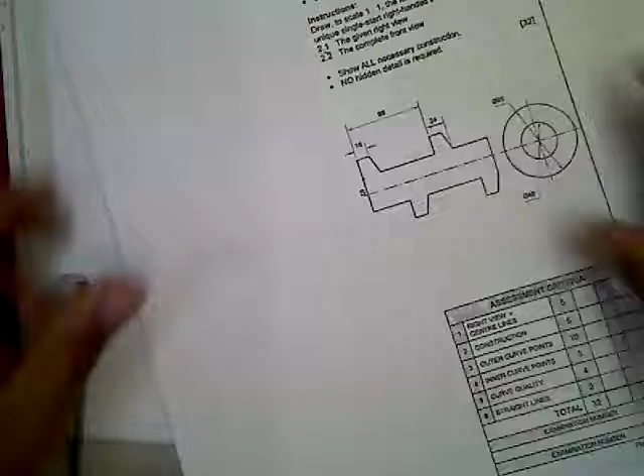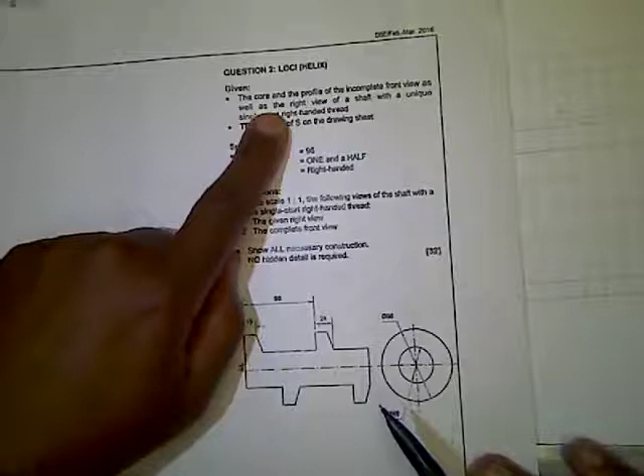Question 2, Loci, from the February-March 2016 question paper. You are given the core and the profile of the incomplete front view as well as the right view of a shaft with a unique single start right-handed thread. The position of S on the sheet is given. The position of S means this position here. That's where you're going to start drawing your front view.

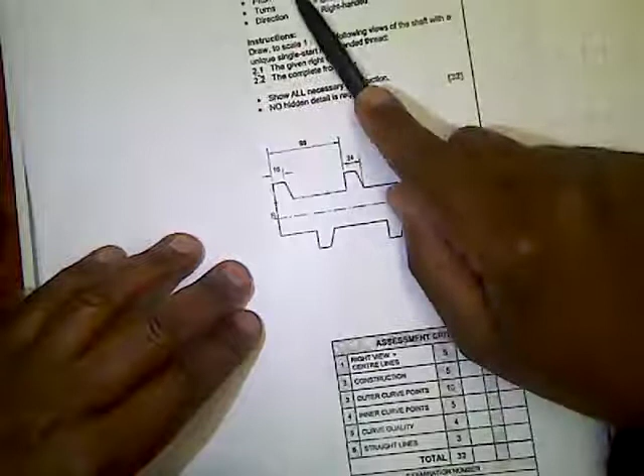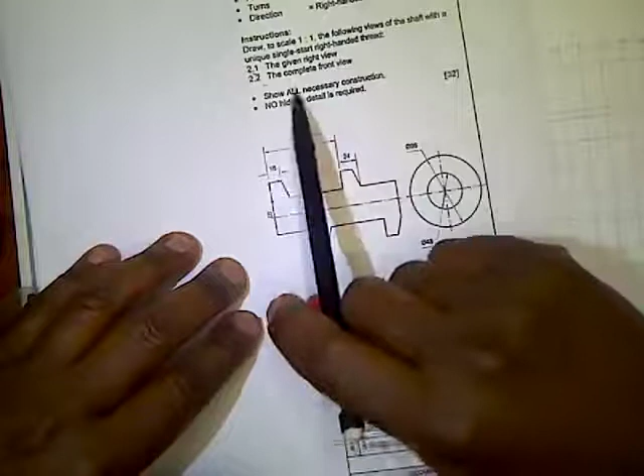Specification: the pitch is 96. How many turns are required there? It's 1.5 turns. Direction: it's right-handed. Instructions: draw to scale 1:1 the following views of the shaft with a unique single start right-handed thread. The given right view, the complete front view. Show all necessary construction, no hidden detail is required.

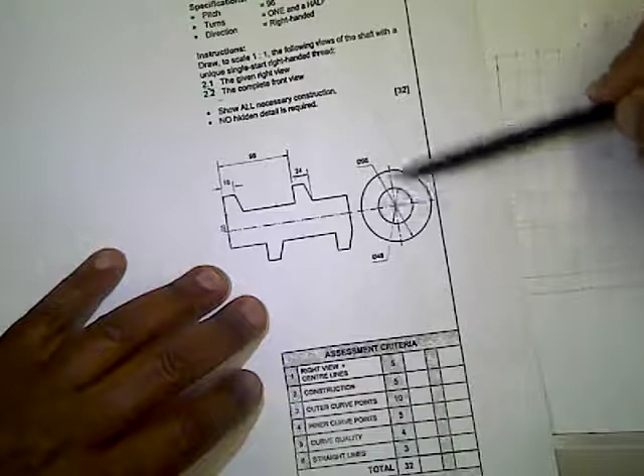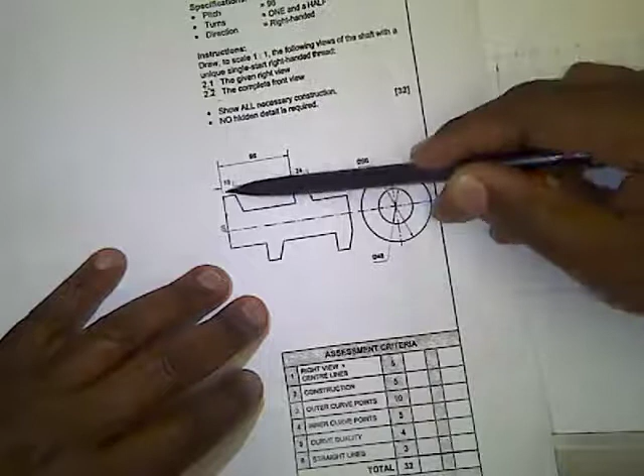Right, the given front view. Here in this front view, all you are given are the dimensions. This is where you are going to start. There was the position of S as indicated. You have your outer diameter of 96, the core diameter which is 48. That one is the pitch, which means one turn of a locus of a helix. One turn is 96, the pitch. So which simply means you will have 1, 2, 3, 4 helices. A complete turn will start this side and end on that side, and then the other half will end there on the other side.

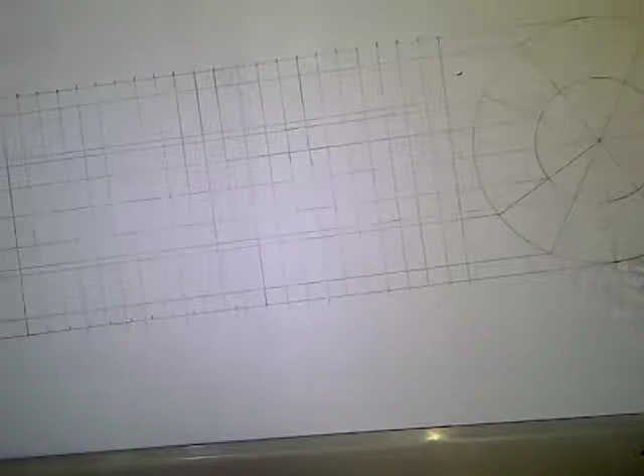So let's start drawing. Fortunately, I have already drawn the front view. I've drawn the two diameters. The 48 millimeter diameter is this one. You cannot see all of it from my camera's perspective, but you have the outside diameter which is 96. So it's already drawn, and it was divided into 12 equal parts of 30 degrees apart. We use the 30-60 degrees set square to do that.

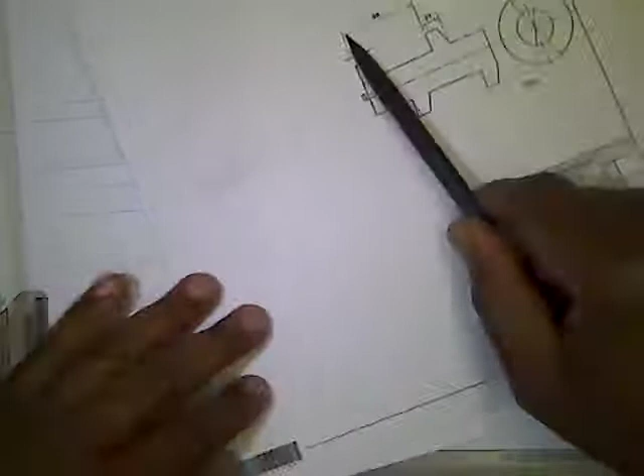And then now, since the pitch is 96, we have to divide this 96 by 12 equal divisions. That will give us 8. So we'll have 8 millimeter divisions there. There is the 8 millimeters. And then 1, 2, 3, 4, 5, 6, 7, 8, 9, 10, 11. The 12th one, that is one full helix. So it is 1.5. The other half will take 6. 1, 2, 3, 4, 5, 6. The other one will take 6.

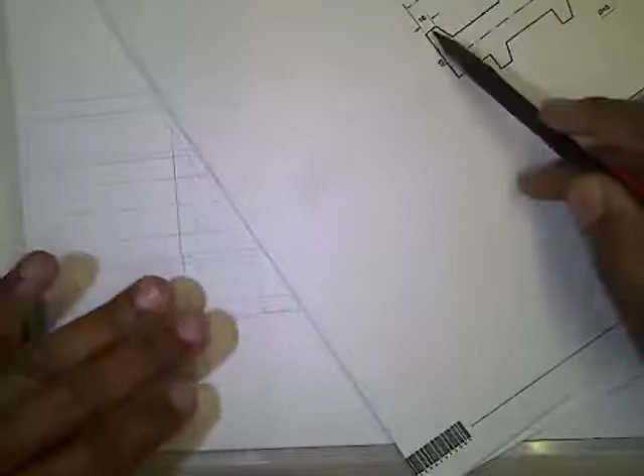It will end there. But let us start, which simply means from here to there, this 16, it takes 2 blocks. So I may prefer to start with this one. One complete turn will end there. If we start here, it will end there. It will give me one complete turn. Let's do that.

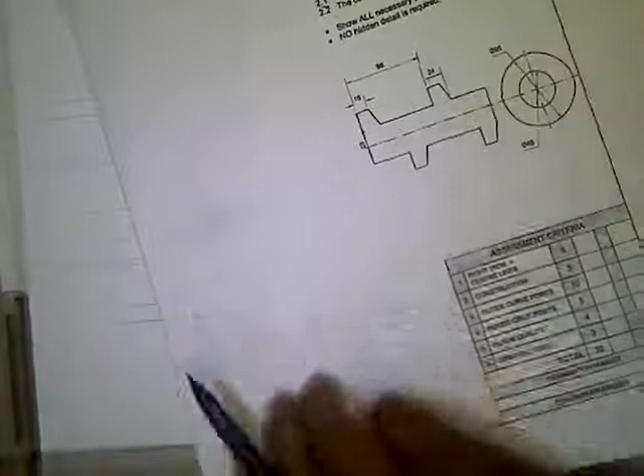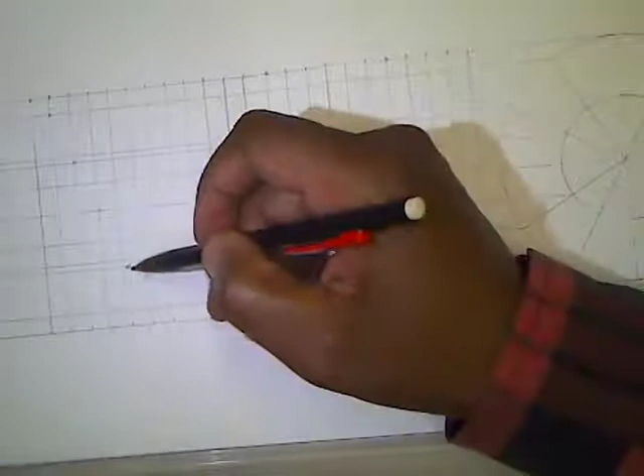We start here. 1. It is the outside diameter. We are taking it from the outside diameter. This one, from the outside diameter, will be 1. The second division, where will it be? It will be here. This one will be 2. The third one will be the center. The fourth one will be this one here. 4, 5, 6. 1, 2, 3, 4, 5, 6.

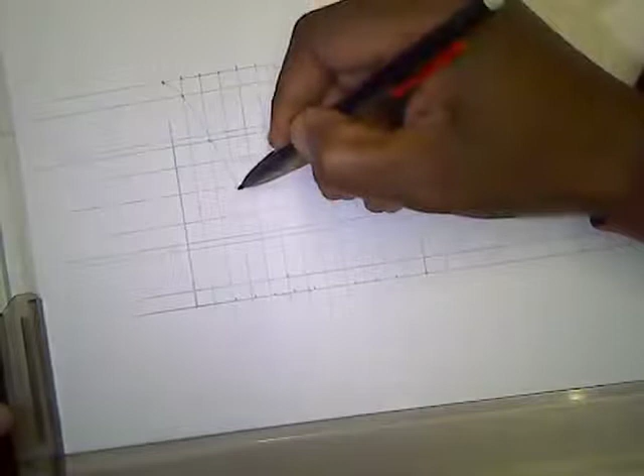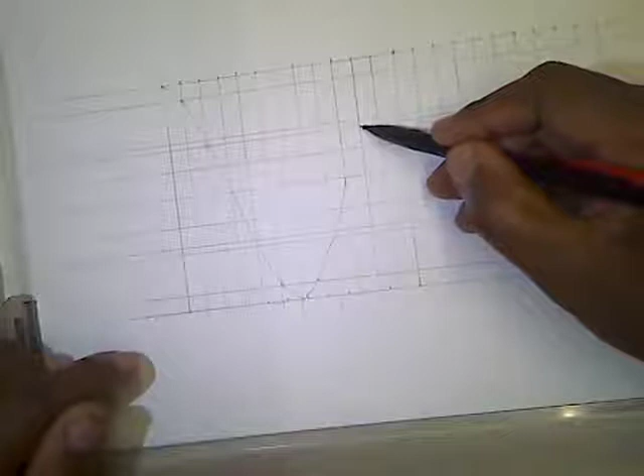I want to draw it very faintly initially. Make sure that your hand is steady. You can do it freehand. Yeah, I'm doing it freehand. It's half a turn to complete the full turn. This one corresponds with that one. 1, 2, 3 is at the center. There we go. And then it will be 1, 2, 3. It will be like that.

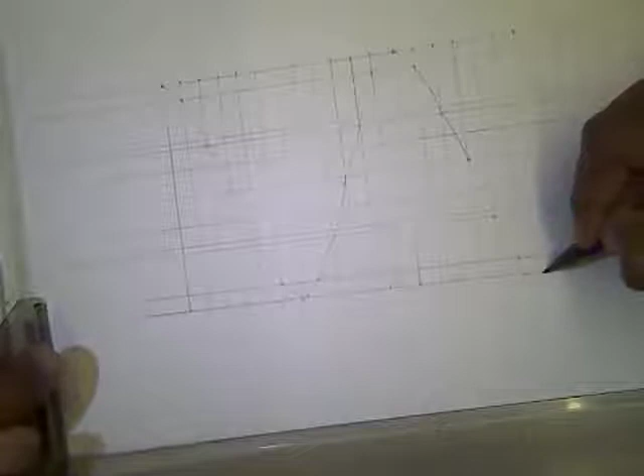That is one helix, one full turn. It ends there. Half a turn. It will be 1, 2. The third mark will be at the center. Then you join these 3 points. Steady, your hand should be steady. And then over there to the other side. 1, 2, and 3. You go up there. And then this is one turn. The next turn. So I've done the first part for this corner here.

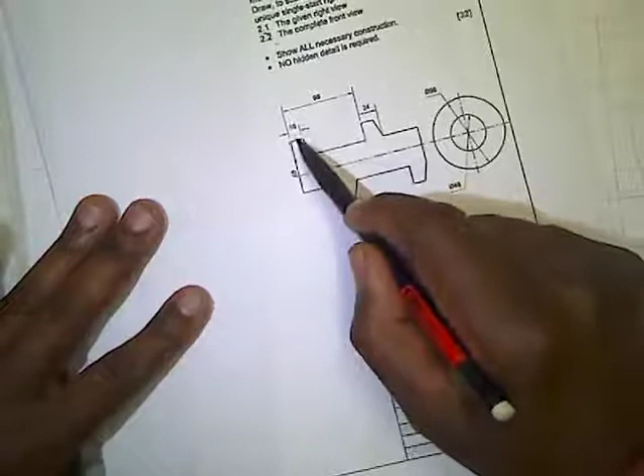So if I'm doing the next helix, I will take this point over there. I'll take this other point, which is 16 millimeters. So remember, our divisions were 8, so we'll have twice those divisions, which means I will start here. 8, 16. I will start here. I'll do the same. It will be 1. Corresponds with that one, 2, 3.

And then it will be 1, 2, 3. Then I join again, and then from here it will be 1, 2, 3.

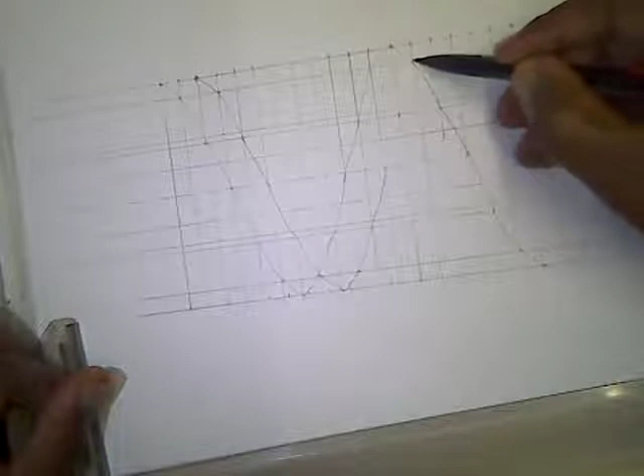One, 2, 3. There we are. The second one also one turn. The next turn will be here. I'll start again there for the half.

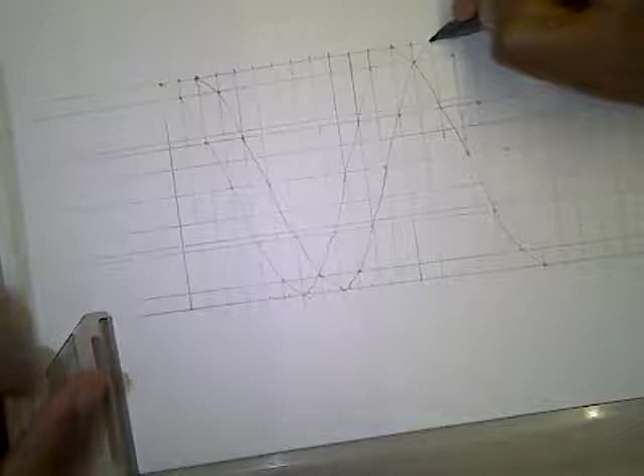It's 1, 2, 3. There we go. And then it will be 1, 2, 3. Aha. Now that is also 1.5 turns. It's 1.5. 1.5 turns. I've completed that one.

Now this is what I want to bring to your attention now. They told us that it is a right. Let's go back to the question paper. It's a right-handed helix. This is my left. That will be my right. So if it's moving from the right, starting, you might notice that I've just shifted my drawing board, turned it around so that I'm able to view it vertically. It's much easier for me. Slightly difficult if I allow it to lie flat horizontally. Now I just put it vertically.

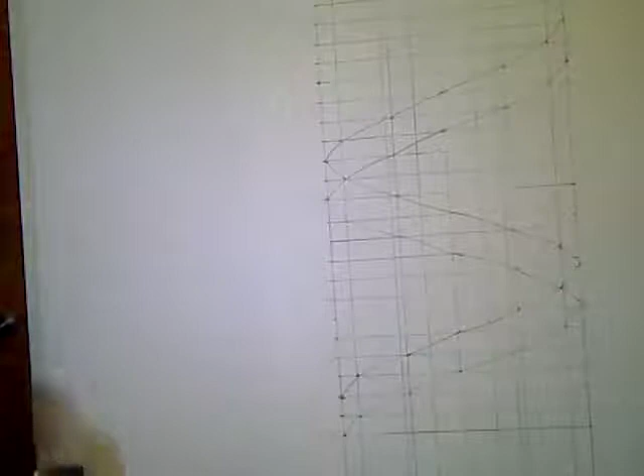So if I move to the right, I move towards that direction. If it's from this side, it goes this way. It's my right turn. And then this is my left hand. It is the left turn, right turn. That I was taught by Memsi Fire. She taught me the turns. I was a little bit confused with turns, but I'm grateful now. I think I do understand those right now.

Now let's look at it now. Since it is right turn, it's moving to the core, this side. Here is the core, which is the solid part, the middle portion there. Here is the core diameter. So it's solid here. You will see when we're about to complete it. Now, since it's right, I can see it as it moves towards my right. There it is. I make it solid here because this is the side that I am seeing.

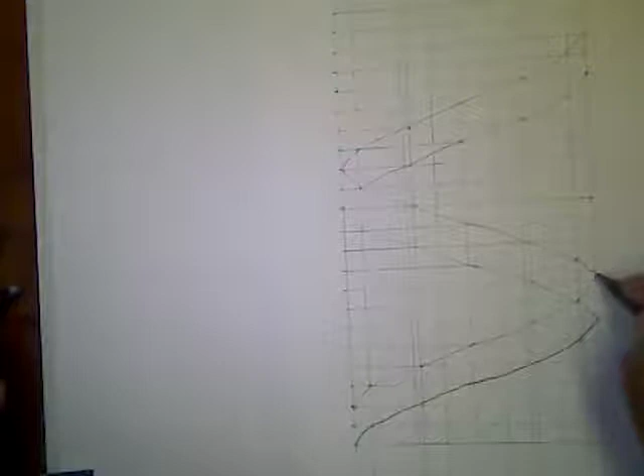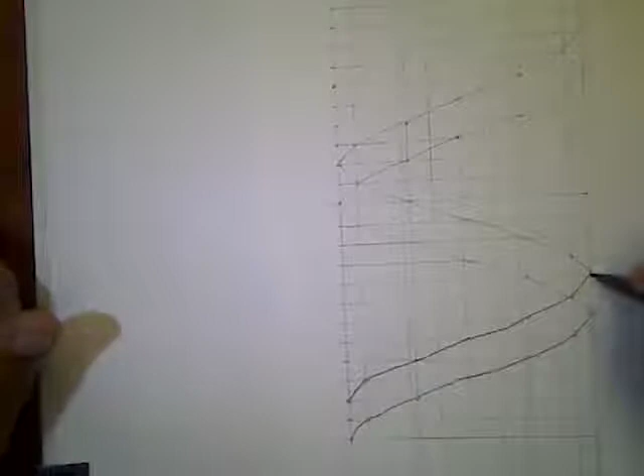You may use your French curve and so on, but if you don't have a French curve, you must practice freehand drawing. You look at these 3 points, and then I join that. Right, then I close it up here, but I may use a T-square and a set square. This one, and then as it turns, it goes behind the core. I won't be able to see it. When it comes back again, I'm able to see this part.

So I can make this solid. Don't breathe. And the other side, yeah. Yes, so there we are. I have these 2 parts that I'm able to see. And then we are about to complete.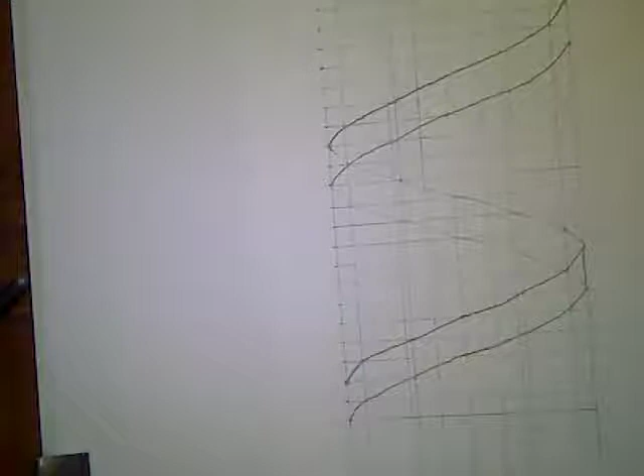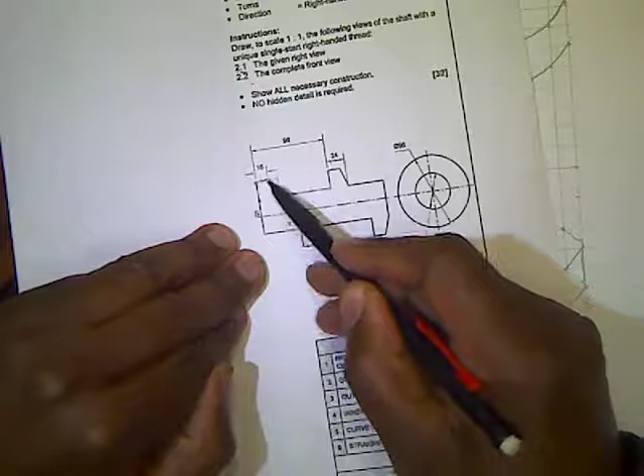Now we're coming to the most intricate part. It's not that difficult, but look at this helix here. This one, we will take it from this 24. Remember, from 16 it will be to 24, which means this part is not in line with this 16. It's slightly up. It's 24, which means we've got 8, 16, 24. It will start 24 up. Let's see. It's 8, 16, 24. It will start somewhere here.

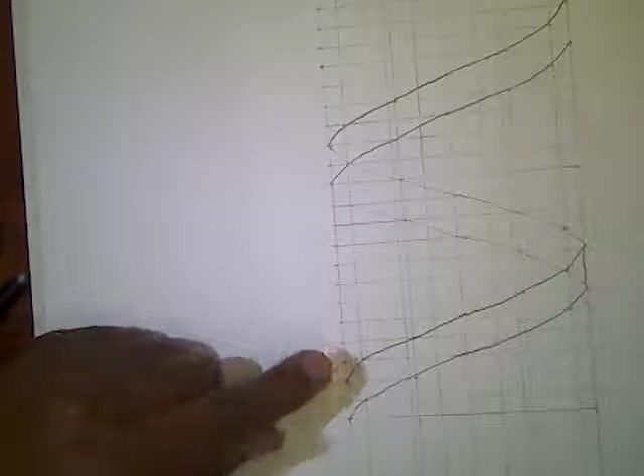But where? Right at the core. Here is my core. It will start here, 24 millimeters away. 4, 8, 12. 8, 16, 24. It starts here. Where is the core diameter? There is the core diameter. It's this one. It will start there. 8, 16, 24, from the core diameter. Here is the line from the core diameter.

It starts there. So I will have other 2 helices. One will start here. The other one will start here at the bottom. Let's start with this one. I'm trying to move very slowly here. You may find another way that is much easier, but for you to understand, I will draw almost everything, not the hidden details, just the construction lines, so that you see how we have plotted this helix.

So now we start here. We are plotting. I'll just show you once. I'll be moving my drawing board up and down. Here is the first point. One is this one. It starts here. The next line is this one. It starts here. There is the next line. It is there.

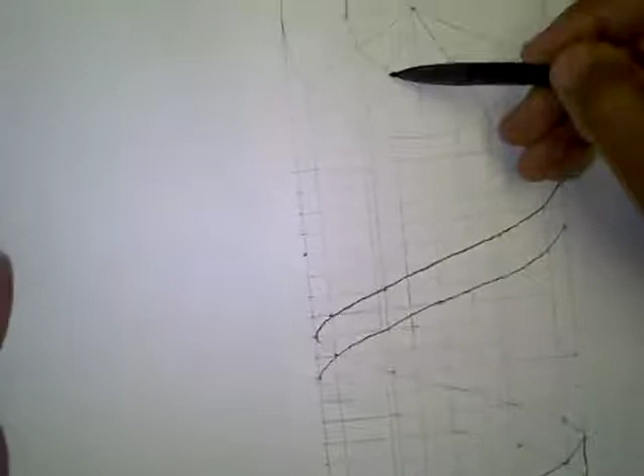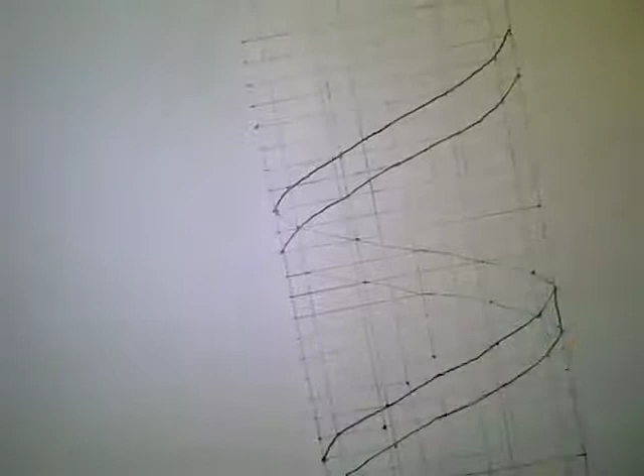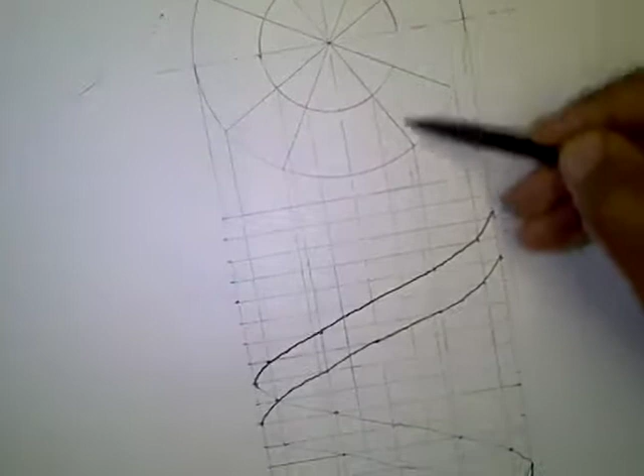One. The other one is there. Third one, considering the core diameter, there. And then we go to the center. Okay, go to the center. It means from this corner, from this point here, we have moved 1, 2, 3 to the center, and then you move up 1, 2, 3 to the other side, to the outside diameter of the core. That side of the core. There it is. So from here it is 1, 2, 3.

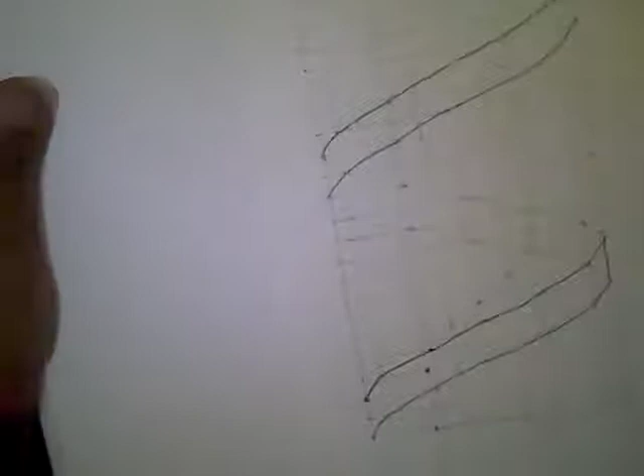So faintly, I'm going to show you faintly. And then we go up here. We've started here. It is hidden by this part. It's hidden, but I'll just draw it very faintly. There. Half of my arc is done. And then I move up again from here to there.

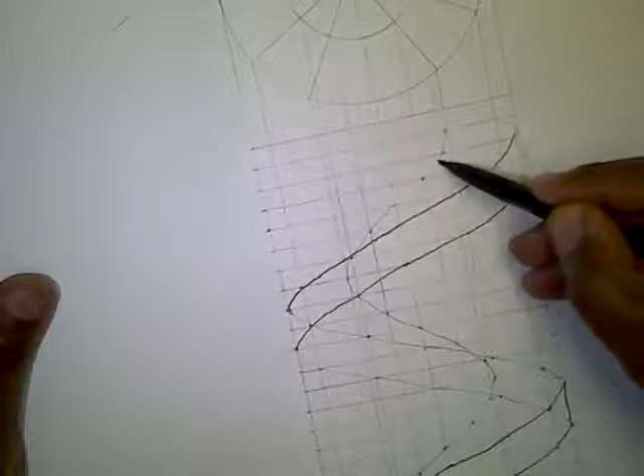1, 2, 3. It will be, and then 1, 2, 3. One. Now we have one pitch. That is the pitch completed. One helix. It's a pitch size, and then the other half, we are remaining with the half of it now. Here it will be 1, 2, 3. 1, 2, 3. The other half will be completed there.

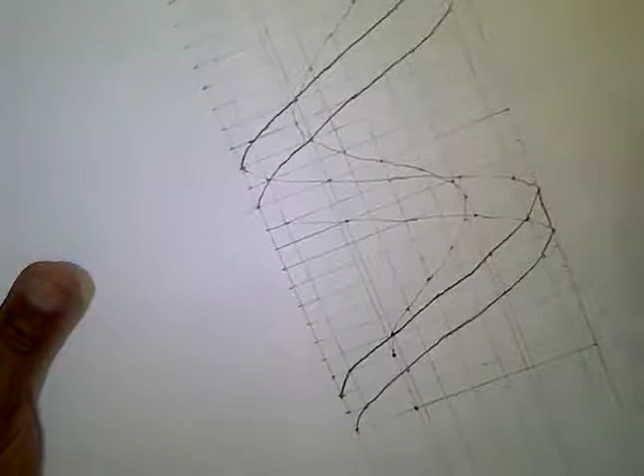Now we have taken this one, the upper one. Now let's consider this bottom one here. The bottom one, remember, when we practice, keep on practicing, you will know when to make it solid and when not to. But now I'm taking you slowly through this. And then from here we start. 1, 2, 3. There we are.

And then again 1, 2, 3. Very faintly I'm doing that. 1, 2, 3 at the center. Your hand should be steady, not shaking like mine. 1, 2, 3. It is now a complete one. That gives you one pitch of a helix. Now a half will be 1, 2, 3. That will be the half.

It is now 1, remember it's 1, half will go there. 1, 2, 3. Very faintly it's there. It's 1 and a half. If it was complete, it will go to the other side so as to complete. Now I've done all 4 of them. Probably you might have seen that. Now let me fill in the core.

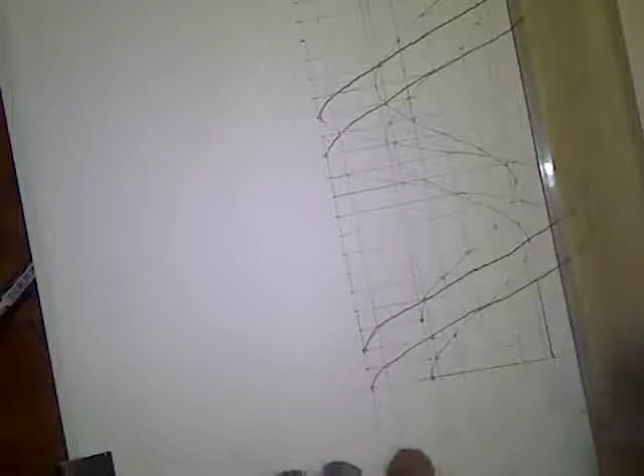And then on this side, remember I said it's a right. Here is my left and my right. So it's on my right. Right turn which goes anti-clockwise. So anti-clockwise, this is the outside part of my helix. So it moves around the core. So even this side, the bottom side of it, you will be able to see it. To make it solid, you will be able to see it.

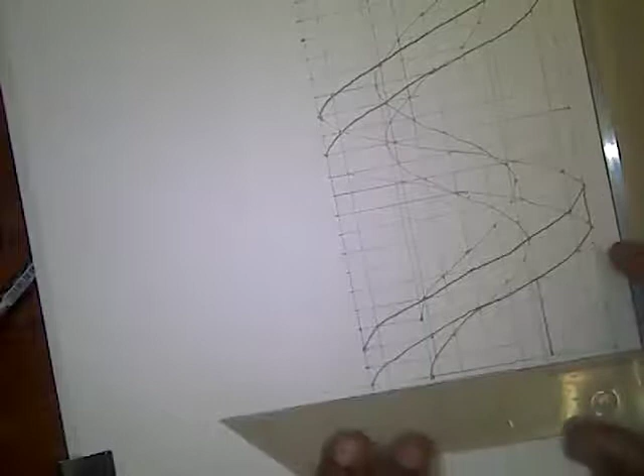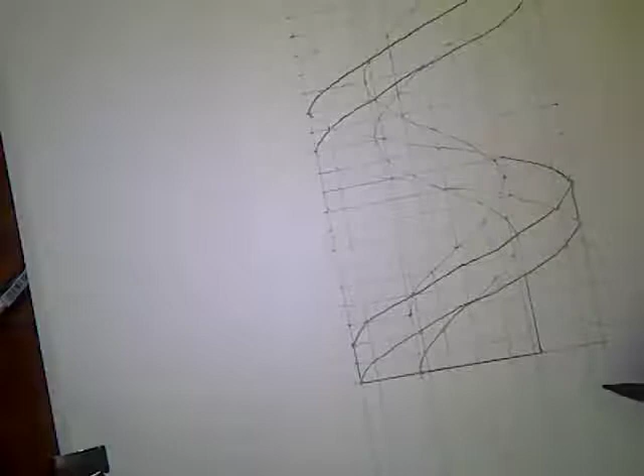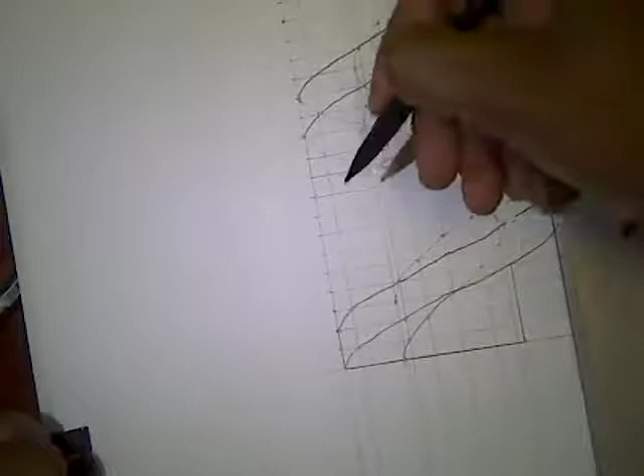Right, remember we've started here. As we go up, it turns here. As it turns, here is the core. It will turn up until here. As it turns up until here, it now goes behind the core. Which simply means here we were able to see the core. So now it goes behind the core, which simply means here.

Alright. I'm filling in some flesh here. This line, maybe that will be able to explain. As it goes behind the core, we are unable to see it. On this side, the core is somewhere here. Here is the core.

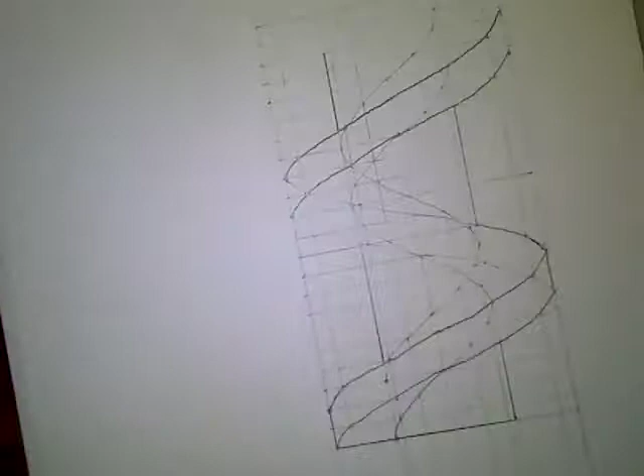Definitely the core will be there. I'm not sure where it will end, but we'll work it out. I'll tell you where it ends. There will be the core even up there. But here, now it will end up to the structure. Remember the core there, it goes up there. So that side, as it goes behind the core, we are unable to see it.

But as it reappears here, we are able to see this part. As it reappears here, we are able to see it. And this line here, because it's outside, you are able to fill in. Okay. Hey, it's not nicely and smoothly done. Let me do it nicely. We do have our eraser that assists us. There we are.

This is what we have. So from the core, let's check what you are able to see. You are able to see this outside part as it goes up there, it goes behind the core and comes back, these two parts, and then it ends there. We are able to see that one, the outside part. Sounds a little bit complicated. It is this outside part. It has moved that side around the core, and then it came back. There it is, up to the 1.5 turn.

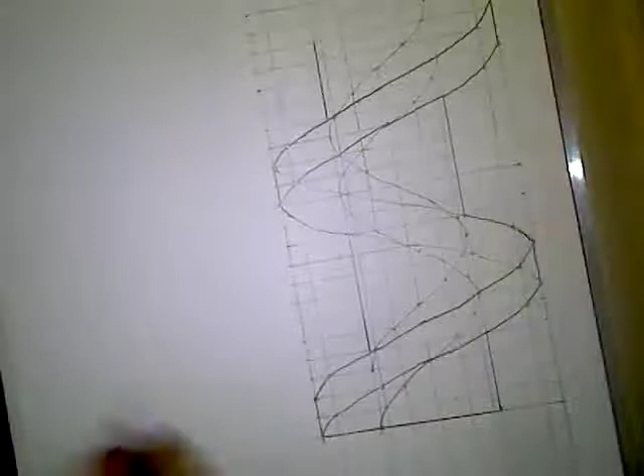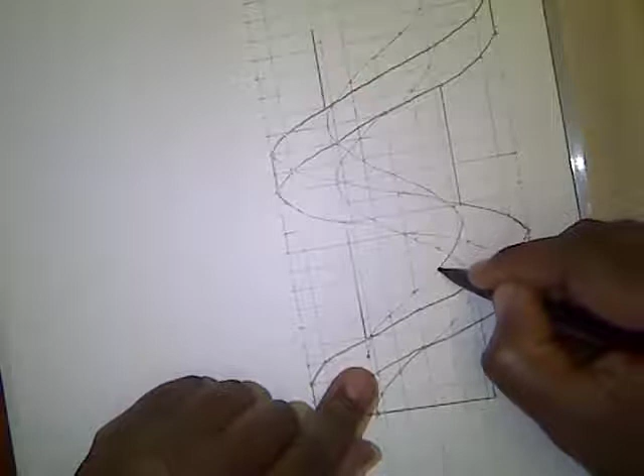Now let's look at the inside part. We will start with this one. We said it's a right hand. It is hidden by these two parts, by these two helices. So it starts appearing here because it's moving on the right. It's in front of the core. As it is in front of the core, which simply means we are able to see it.

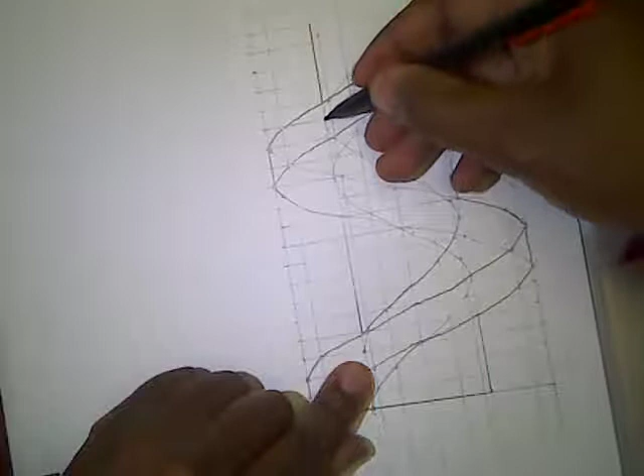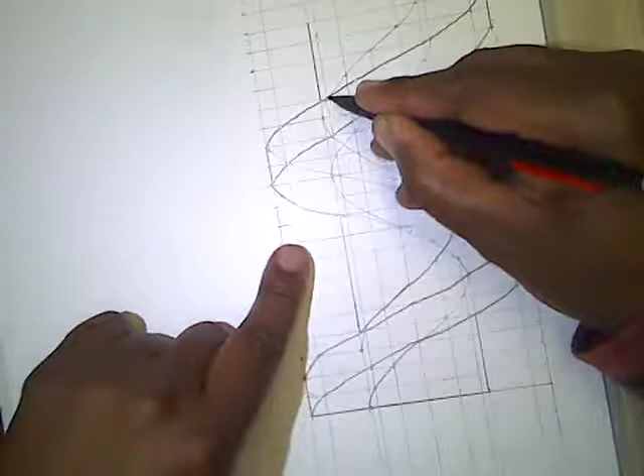And then once it reaches there, it starts from here. It starts now going behind the core. It goes behind the core up until here. And then once it is here, it comes in front of the core. It will move, but it's hidden by this outside one, but we'll start seeing it from here. And then from here, we start seeing it. Alright, up to there. We start seeing it up until here. Right?

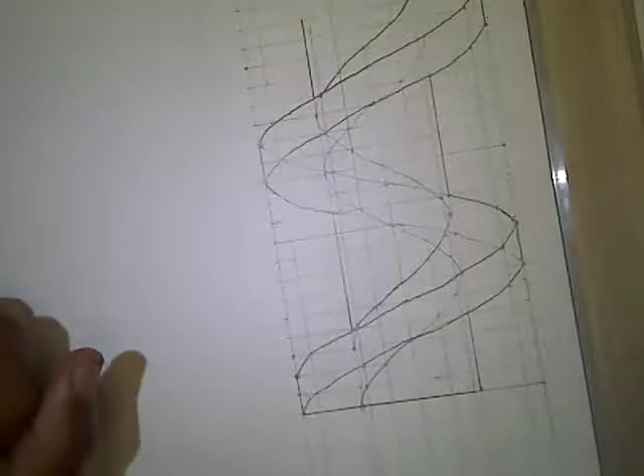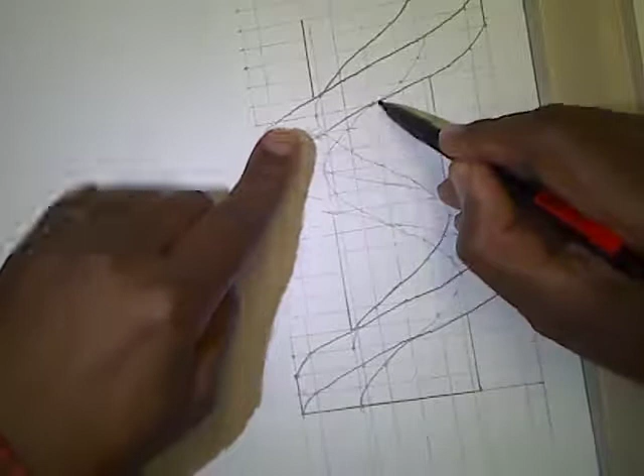Then, what else is left now? We were able to see this curve. Where does this curve go up until this part? Remember this one, we start seeing it as it comes back to the last. It's a pair of that one. From here, we are able to see it. As it starts here, we are able to see it up until here. It's kind of a little bit difficult for me to explain it for you, but now you can work out which parts you are able to see.

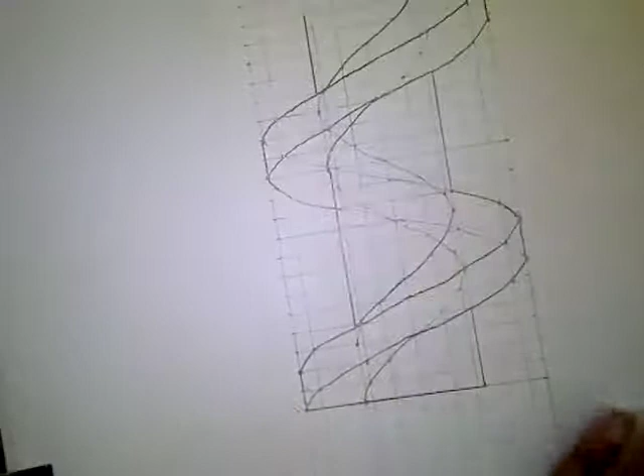You are able to see it here. You didn't see it as it goes that side, and then it reappears. You are able to see it there. And then you will have something like that. Now, these are just faint lines. Maybe I will use a pen so that I'm able to show you every piece of it.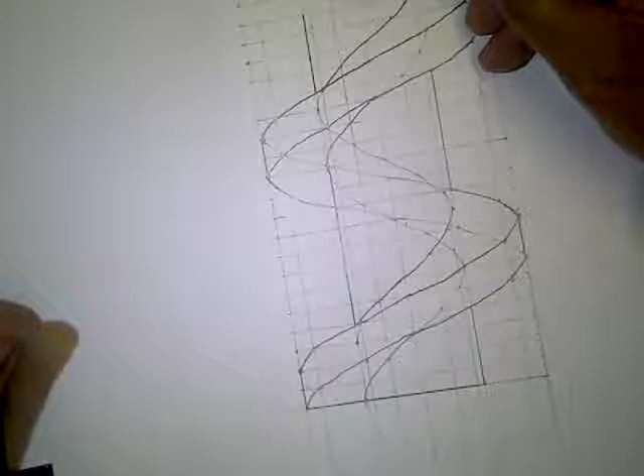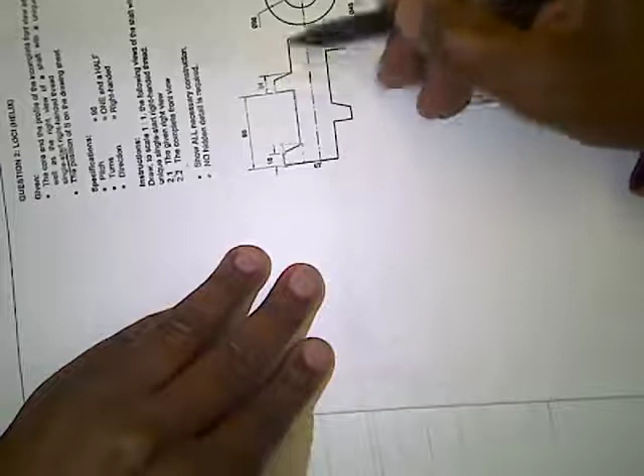Yeah, right. This one that ended up here, it's 1.5 turn. It ended up here. The other one ended up here. Which means our height will be there. Don't consider that 96. This 96 that you see here doesn't mean from here up to the end it will be half of 96. Because when you start with this helix, it won't end at 96. It must have its own 96 that will be projected slightly above that.

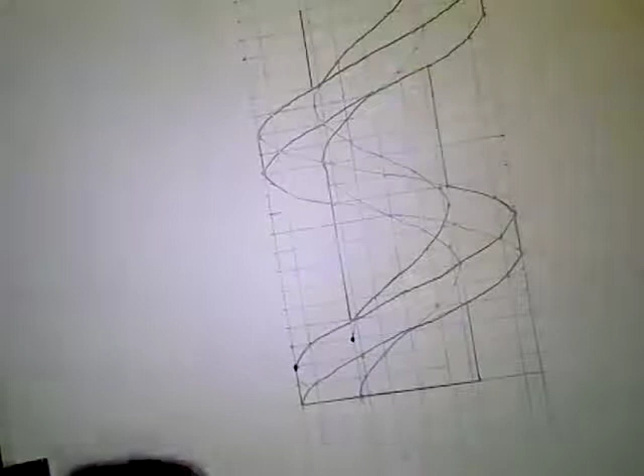Even this one, it will end up there. It's 96. So that is why you see it being uneven. Look, when we started, the outside part is lower than the inside part. Even when we end, the outside part is lower than the inside part. But this is where our helix ends. If it was going to continue, this one would move that side up to the center. But now because it ends here for 1.5 turn, we will have our helix ending there.

It's a little bit confusing, but these lines were not necessary. They were just there to show you how we came about doing all that. Now, let us finalize on what you see, because it's a right turn. When you understand how this thing is drawn, you will know you are moving towards the right, and if you are moving towards the right, you will have to do this. You are seeing it here. You are seeing it as it moves towards the right.

As it moves towards the right, all these helices, you are able to see them. Don't use a pen; I'm using a pen so that you are able to see clearly. Yeah, we are able to see this part, and it ends there. And then here is the core. From the core, you are seeing it moving in front of the core, and then now it will go here.

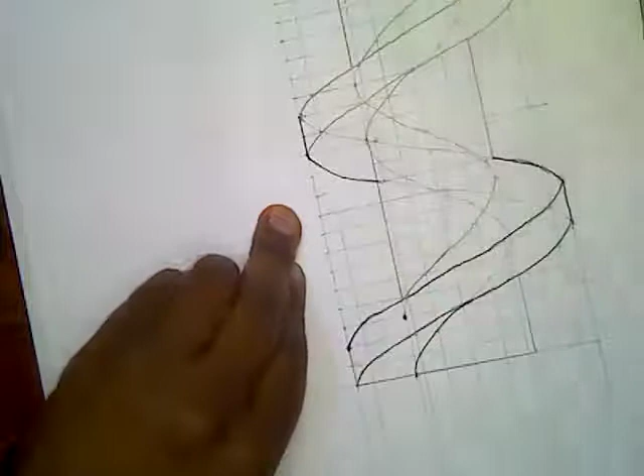It is behind, it is on the other side, and then it will come back. As it comes back, you are able to see it. This side, you are able to see it. Even these two outside layers, you are able to see them. Which simply means this goes behind the core. You are unable to see it. As it came back, this outside part of the core, you are able to see it.

Now, the inside part. From the inside, if I start with this bottom one here, you are able to see it as it goes up here, and then it gets underneath this one. You are unable to see it. And then once it reaches the core, it moves behind the core. You are unable to see it, and it appears there.

From here, you are able to see it, because it's moving in front of the core. And then ultimately it gets underneath this outside part of the core, right up until there.

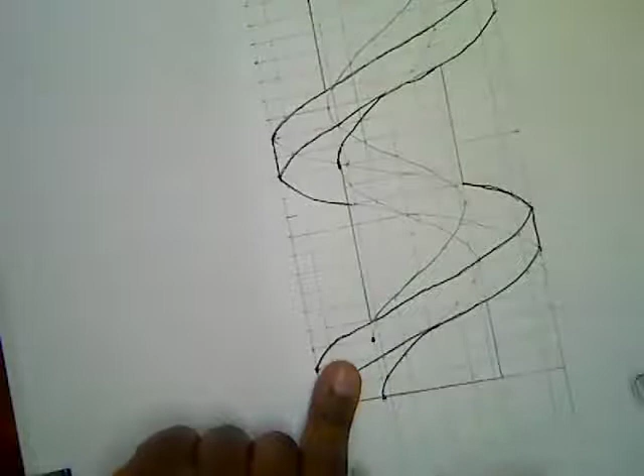Now, the one that is on top of that one, the upper one, it starts here. It's hidden by this outside part here, but you will start seeing it as it moves to this point. From this point you are able to see it. You are able to see it here, and then it goes behind the core. Once it starts going behind the core, you are unable to see it.

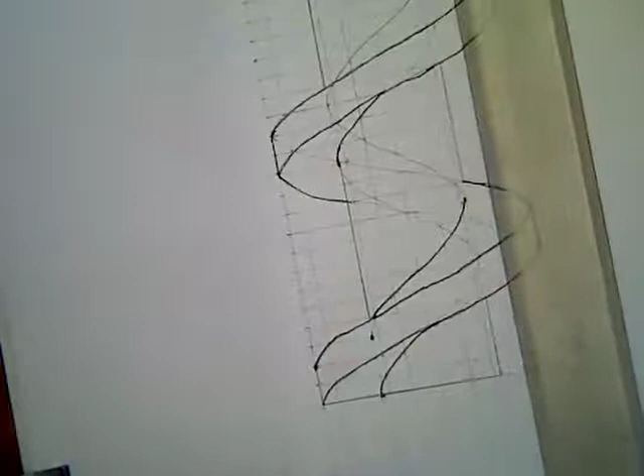It goes behind the core. Then you are unable to see it. There it is. And then it reappears now in front of the core. But now it's still hidden here by the outside one. It goes up there, and then from here it starts appearing. Then from there you start seeing it.

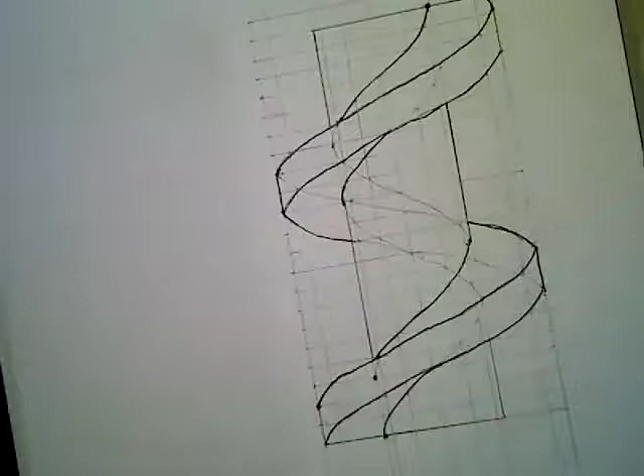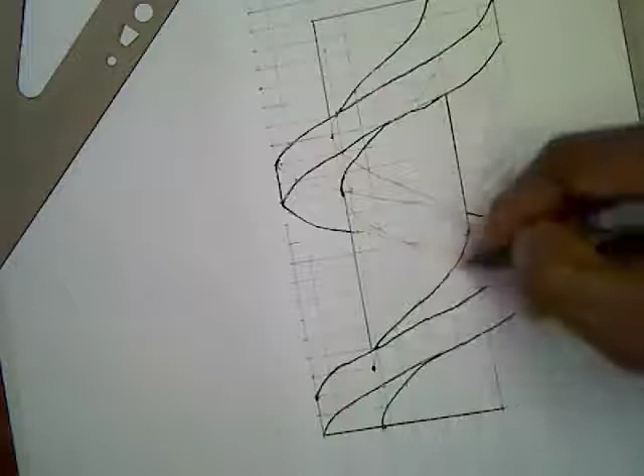These lines are not there. They were supposed to be hidden details if they wanted the hidden detail. But look at the ones that I've made darker. Those represent the helix that we were doing, which is the right-handed start. It will look like that. Voila! I think I'm done.